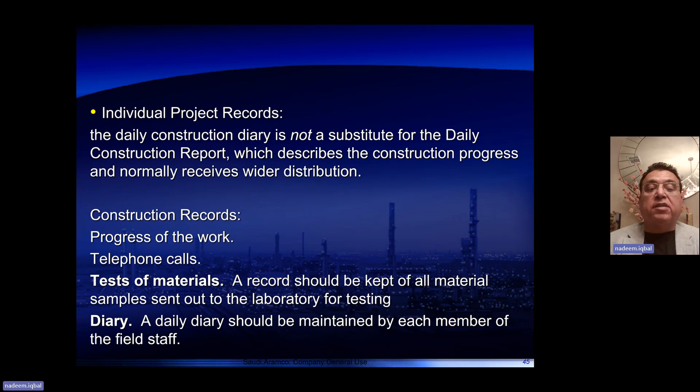Log of submittals: all materials being transmitted to the architect or project engineer through the resident project representative, that log has to be maintained. Again, it will be helpful in any kind of claim.

Construction field office files. Upon completion of the work, the files should be turned over to the architect, who will retain some and forward the others to the owner for retention. The field office file should include the following categories. So once the project is complete, the project representative is supposed to take all the files and give them over to the architect or an engineer. The files relevant for the architect's office or engineer's office, they will keep, and the rest of the documentation they send to the owner.

The documentation sent to the owner also includes some warranty documents and other details of the drawings, so that if down the road something happens to the project, the owner has complete documentation, drawings, and specifications of the construction. This documentation includes correspondence, job drawings, shop drawings, requisitions that were made, reports that were generated, any test samples, and also the tests that were done.

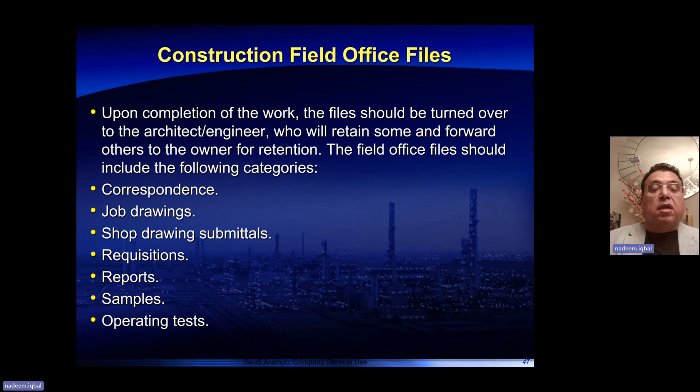Daily construction reports. The content of a daily construction report should include the project name, the job number, the client's name, the contractor—and when you put the contractor's name, you always put the general contractor's name. You do not put the subcontractor name, because the project's contract is with the general contractor. Also include the name of the project manager for the design organization, the report number, and the date of the report.

Average field force, both supervisory and non-supervisory—the number of employees working on the project should also be listed. And then you keep the log of work commenced: the status of work in progress and all new work that started.

Construction diary is an important document. It should be remembered that it is frequently necessary to consult a field diary to give testimony during a court trial. So that is a very important document and it needs to be tracked. Once the project ends, the construction diaries, or field diaries, need to be given to the office. Although it is wise for the inspector to retain a copy of its contents, the diary must normally be turned in with the job records at the end of the construction project. So it's better to return that in.

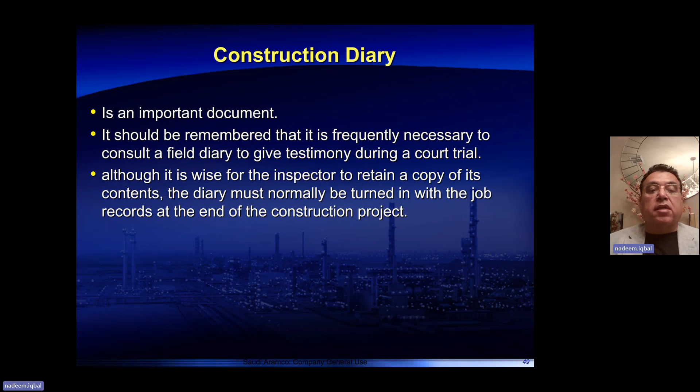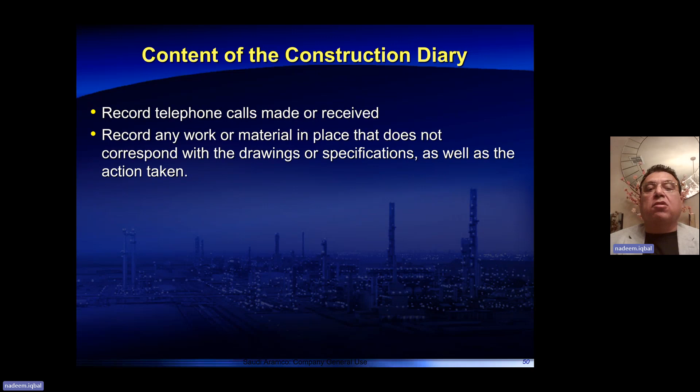Content of the construction diary: record telephone calls made or received, record any work or material in place that does not correspond with the drawings, record time and name of the contractor's representative, note any unforeseen conditions observed by the inspector that may cause a slowdown by the contractor. So if the project management team representative observes a slowdown of work, he should immediately make a note of it in the diary.

Record all field errors made by any party at the site.

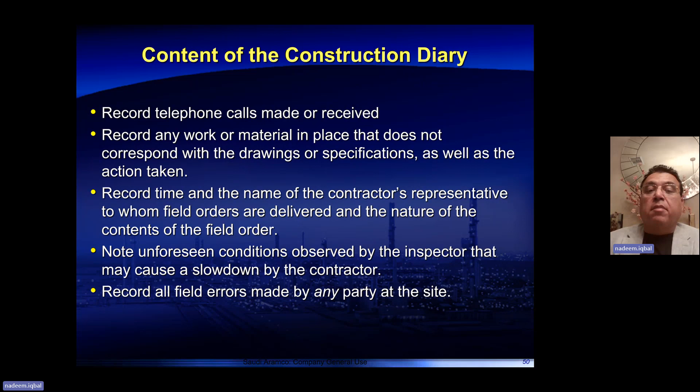Who should maintain diaries and daily reports? A construction diary should be kept by every individual involved in the project. The daily construction report, by comparison, is prepared and submitted only by the resident project representative. Although different entities working on the project maintain their own diaries, the one diary which is prepared and submitted is the resident project representative's diary. Because the resident project representative is the focal point, whatever he documents carries weight.

Documentation of dangerous safety hazards and warnings, and action taken by the owner's field representative and contractor from a safety perspective, needs to be documented. Failure to document could result in serious charges being unfairly logged against the design organization or owner for failure to take affirmative action in case of a death. So this is critical. Whenever there is a safety issue or a near miss, you have to document it, even if nothing happened, and take action on avoiding that hazard. Down the road, if there is a trial, that diary can be produced in court as proof that you took all the preventive actions.

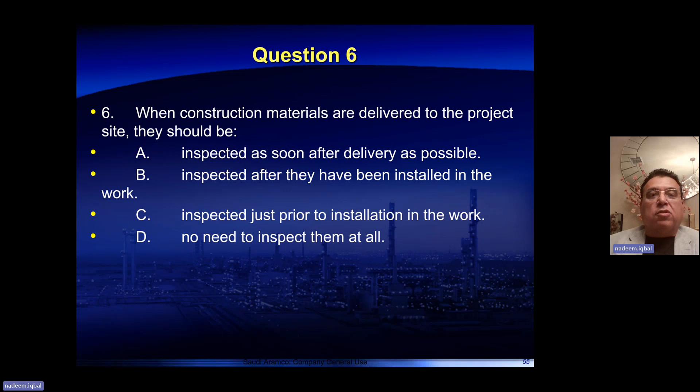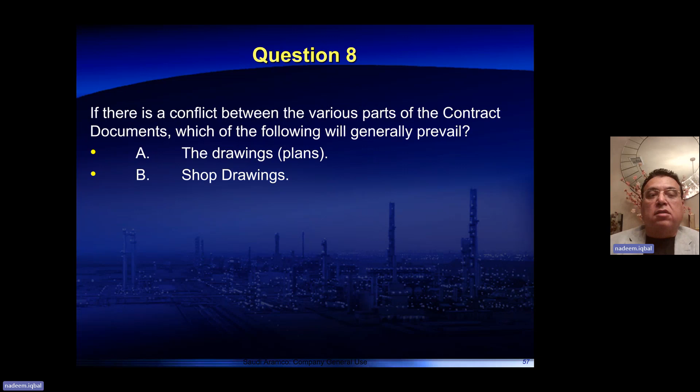Question number 8. If there is a conflict between various parts of the contract documents, which of the following will generally prevail? A, the drawings; B, shop drawings; C, specifications; D, invitation for bids. The correct answer is C, specifications.

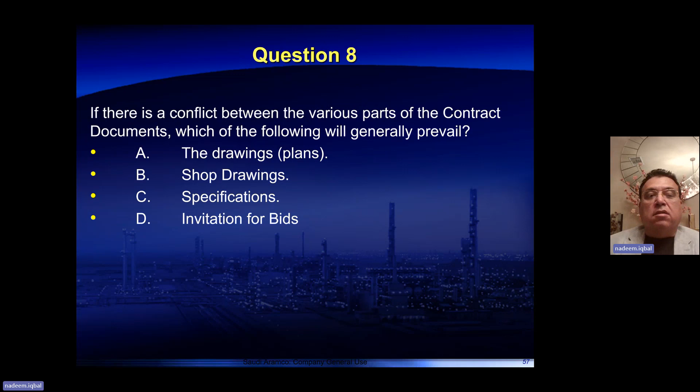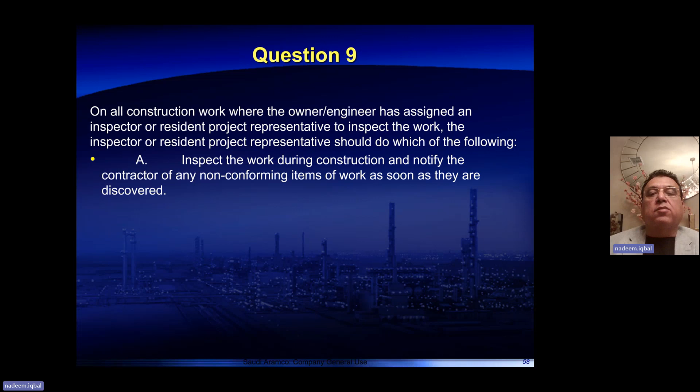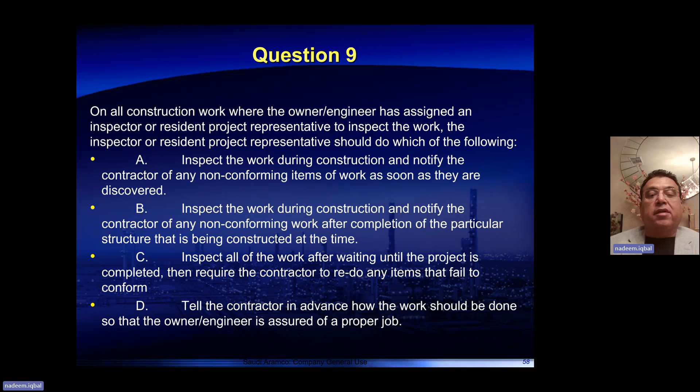Question on all construction work where the owner or engineer has assigned an inspector or resident project representative to inspect the work, the inspector or resident project representative should do the following: A, inspect the work during construction and notify the contractor of any non-conforming items of work as soon as they are discovered; B, inspect the work during construction and notify the contractor of any non-conforming work after completion of the particular structure; C, inspect all of the work after waiting until the project is completed; D, tell the contractor in advance how the work should be done so that the owner is assured of a proper job. So what's the correct answer? The correct answer is A, inspect the work during construction.

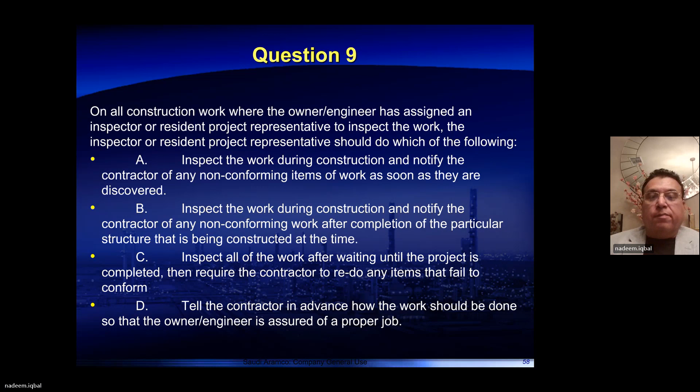We go to contractor submittals. The normal recommended procedure for handling submittals from the contractor is to require that all such submittals, for example shop drawings, samples, certificates, or other similar items, be made directly to the resident project representative.

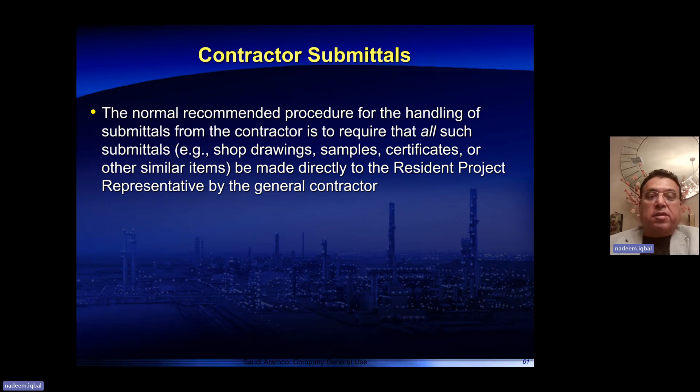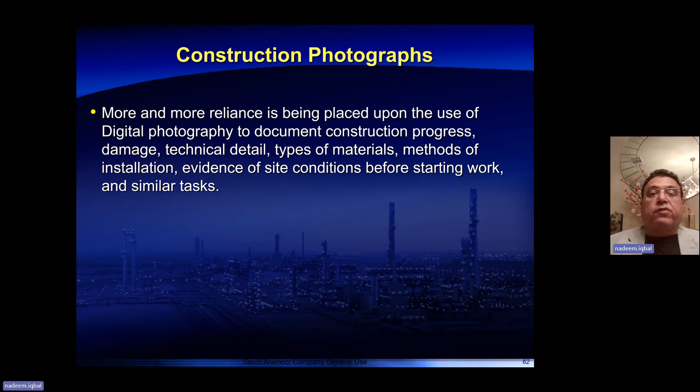Construction photographs: more and more reliance is being placed upon the use of digital photography to document progress. As part of the documentation, you're also required to take photographs of different project progress. Basically, it is the resident project representative who will be called upon to do the photography.

So what it is, they have a database of windows and different components of a project, let's say of a building, and using the BIM model, they would take those components and put them together, and it becomes a BIM. These components have real properties such as fire rating, manufacturer, and material. As the database changes, any instances of those items in the model can automatically reflect these changes.

So these different items which are in the BIM model, they have metadata. Metadata is the data which explains the details of those items, so that metadata is also available. If in your BIM model you put a door in a room, that door would have a specification, and that specification is stored in the database.

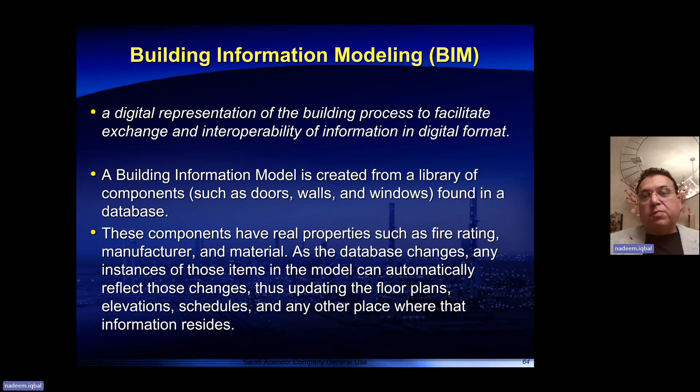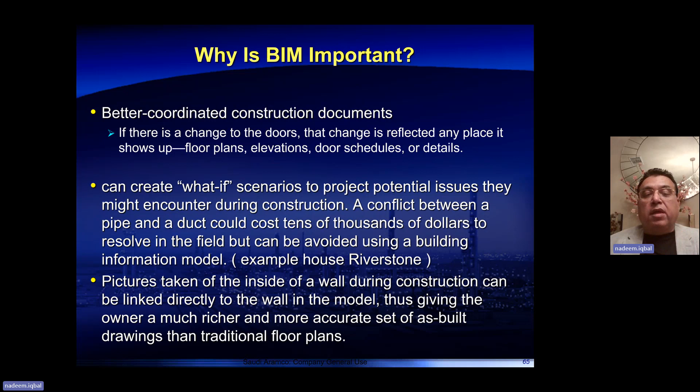Pictures taken of the inside of the wall during construction can be linked directly to the wall in the model, giving the owner a much richer and more accurate set of as-built drawings. So in the BIM model, you can also link to photographs from real life, and with those photographs linked into the model, when the owner looks at the model, it gives a true impression of what the construction project status is.

BIM and integrated project delivery introduces the idea of shared risk among the designer, owner, and contractor. The focus is on shared project goals rather than individual goals. So with this BIM model, the owner, the contractor, and the designers are all looking at the model together, trying to improve it and visualize it. So there is ownership, a shared risk component here.

That it's like everybody working together. This results in greater collaboration among project teams and helps resolve conflicts earlier in the process. Traditional construction or project management activities such as tracking requests for information and change orders are reduced, because since there is coordination between the different entities, the number of change orders would reduce due to better coordination.

Industry trends with BIM adoption: most large architects, engineers, and contractors are developing their BIM strategies. You have products in the industry called BIM Manager or Virtual Construction Manager. The power of visualization, coordination, simulation, and optimization from 3D, 4D, and BIM computer technologies allows more effective means to meet customer design requirements.

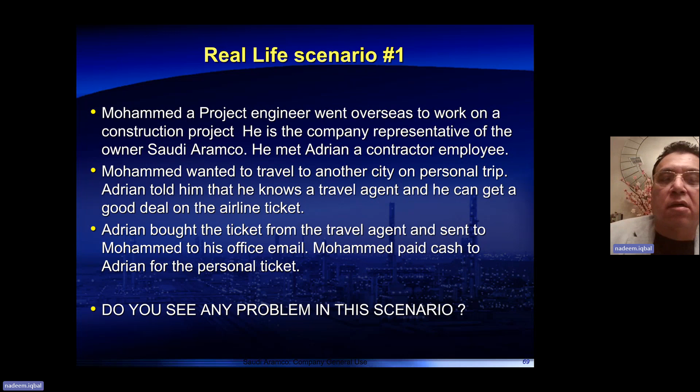So in this scenario, do you see any problem? Muhammad, project engineer, went on a construction site and met a contractor employee. The contractor employee told him that he knows a travel agent who can help him buy a ticket for a personal trip. Although Muhammad paid cash for the personal ticket, is there a problem? Think about it.

Yes, there is a problem. Muhammad was not allowed to interact on personal issues with the contractor. In this real life scenario, Muhammad did something wrong, unethical, and he had no way to prove it because he had paid cash for the ticket. So the end result was Muhammad, the young project engineer, lost his job. This actually happened. I want to bring this to your attention so that if you come across a scenario, you know that anything which is personal should not be discussed or resolved. Personal issues should not be resolved with the help of a contractor.

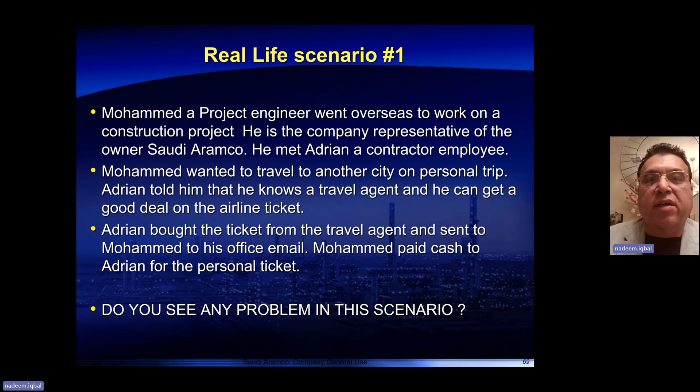Real scenario number 2. Muhammad is a project manager working on a construction site. He is representing the owner of the project. He has employees working under him. The contractor company is supposed to provide breakfast to Muhammad's employees in the cafeteria. Muhammad tells the contractor that instead of giving breakfast, just give $15 each to his employees every morning so they could buy their own breakfast. Do you see any problem in this scenario?

So what the project manager did was tell the contractor, instead of providing breakfast to my employees, why don't you give them $15 each? They will buy their own breakfast and won't have to go to the cafeteria. Is there a problem with that? Yes. Muhammad should not have done that because, as per the contract, the cafeteria is provided by the contractor, and he should not have asked the contractor to pay cash to his employees in lieu of the breakfast.

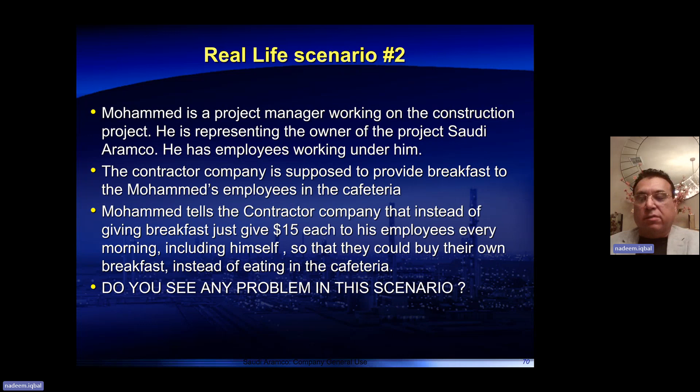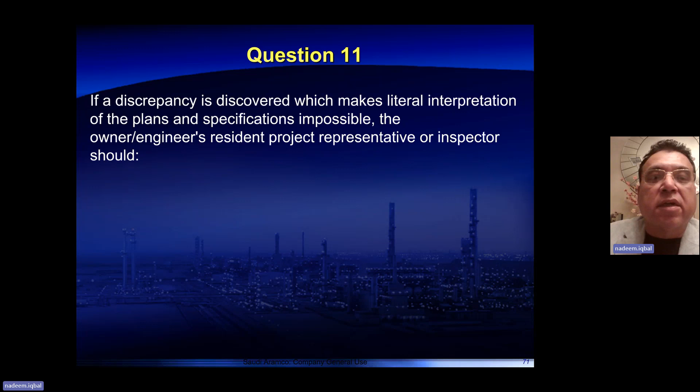Now we go to question number 11. If a discrepancy is discovered which makes literal interpretation of the plans and specifications impossible, the owner, resident project representative, or inspector should: A. Tell the contractor to cut to fit. B. Telephone the project manager. C. Work out a solution. D. Make a deal with the contractor. Correct answer is B. Telephone the project manager or engineer responsible for the plans and specifications for instructions before proceeding with the work.

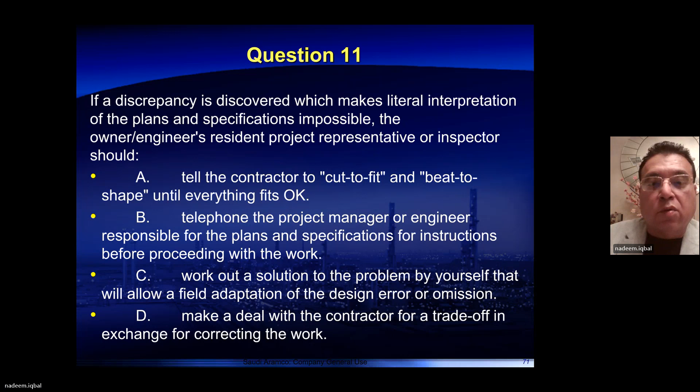Question number 12. When the owner, inspector, resident project representative, or contractor superintendent leaves the project site for a while, it is permissible to do which of the following? A. Leave the site. B. Leave word that you will be out. C. Close the job for the day. D. Notify your office of your absence. Correct answer is D. Notify your office of your absence and leave a number where you can be reached.

13. When a small change is to be made in the field which will result in a departure from the original plans and specifications, the owner, engineer's resident project representative, or inspector should do which of the following? A. Issue a change order. B. Make an oral deal with the contractor. C. Issue a change order or work directive change. D. Allow the contractor to unofficially make the change. Correct answer is C: Issue a change order or work directive change for each such change.

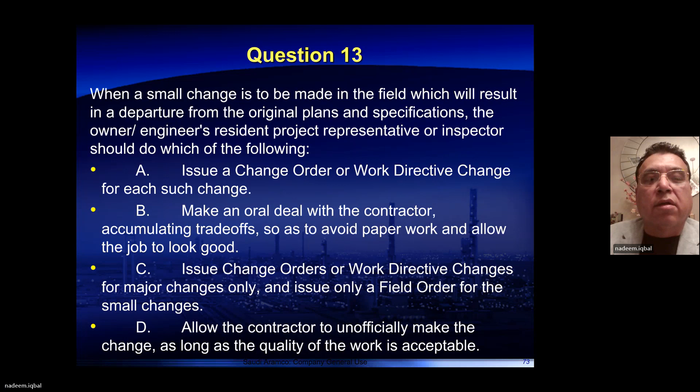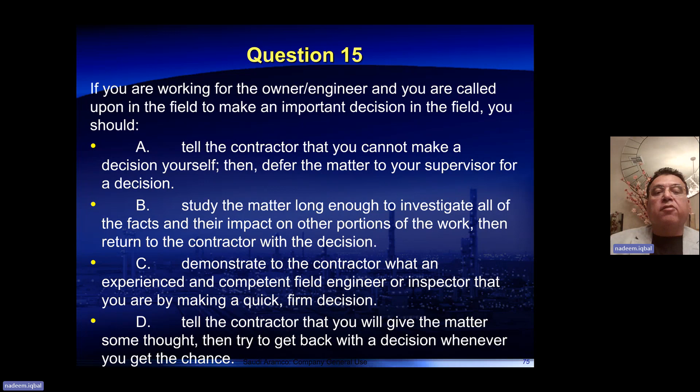Question number 15. If you are working for the owner/engineer and you are called upon in the field to make an important decision, you should: A. Tell the contractor that you cannot make a decision yourself. B. Study the matter long enough. C. Demonstrate to the contractor what an experienced, competent field engineer would do. D. Tell the contractor you will give the matter some thought. The correct answer is B: study the matter long enough to investigate all the facts and their impact on other portions of the work, then return to the contractor with the decision.